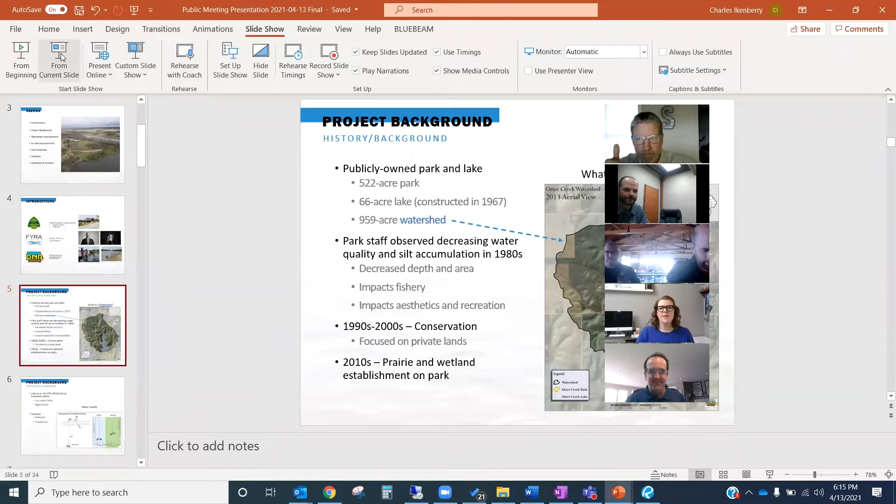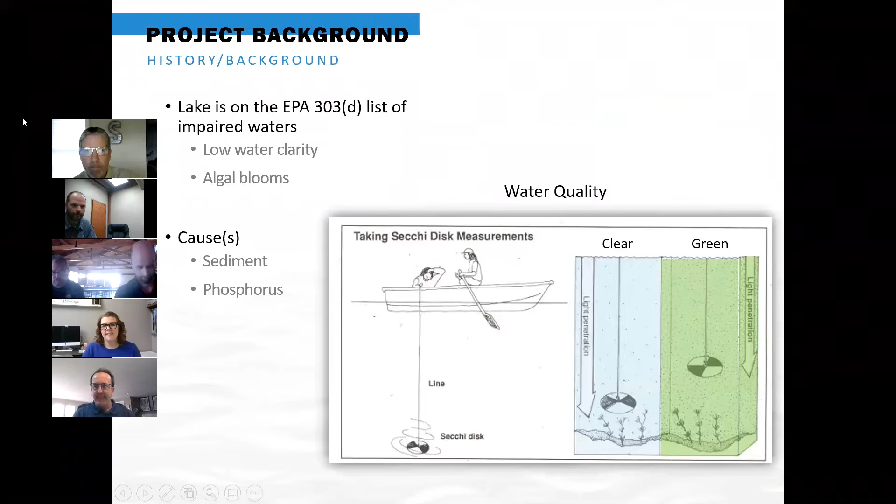Hey, Charles? Yes, George. I'm sorry to interrupt. I do not have any presentation up on my screen right now. Okay. Am I the same as everyone else? Okay. Sorry to interrupt you, but. Okay, let me reshare. You would think after a year plus of doing this, it would not be new technology, Michelle, but we're good to go again? Okay, thank you, George, for jumping in. Okay.

So a watershed, as I described earlier, now you should be able to see the map that shows the watershed or the land that surrounds the lake that drains to the lake. After being built in the late 60s, Tama County staff quickly noticed that some things were changing in the lake. Water quality was decreasing and silt had begun accumulating already in the 1980s. Noticed a loss of lake depth and some areas at the upper end of the lake that were filling in with sediment. And that, of course, impacts the fishery and also just impacts recreation and how the lake looks.

So as a result of that, conservation efforts got underway in the 1990s and early 2000s, focusing mainly on private lands in the watershed, implementing practices such as terraces and grassed waterways, things to help try and keep sediment from being transported through the watershed, making its way into the lake.

And then later in the 2010 era, Tama County did a lot of work on the park itself, establishing native prairie, tall grass prairie plantings with long-rooted vegetation, very dense vegetation that really cuts down on the rainfall runoff and the amount of erosion that can impact the lake, as well as establishing wetlands and a couple of smaller sediment ponds, in addition to one very large sediment pond on the park ground. Craig, is there anything else you'd like to add about the background or the history of the lake or the park?

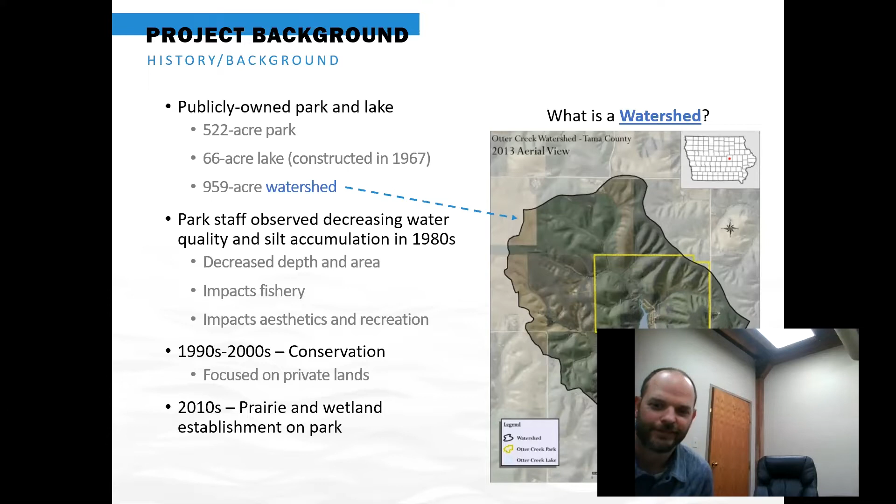So why are we here then? Despite all those past conservation efforts, which have been successful, the lake is still officially impaired. And what that really just means is EPA maintains a list of water bodies in the United States that don't fully support all of their intended uses. And so Otter Creek Lake is impaired because of low water clarity, which is most often attributed to algal blooms.

And an algal bloom is just simply an excess amount of algae that are a completely natural part of a lake ecosystem. But when they become too dense, you'll notice that murky green color, and it can affect aquatic life and recreation. And so the cause of that in Otter Creek Lake is twofold. Low water clarity is caused by both sediment, but also phosphorus.

Now, phosphorus in and of itself is just a nutrient. There's nothing wrong with phosphorus. But what phosphorus can do is fuel a little excess growth of algae, which can create that green color in the lake. So we want to try to reduce the amount of sediment and phosphorus entering the lake. And in some cases here in Otter Creek Lake, we're actually going to be exporting that material that's accumulated over time. We want to get it out of the lake.

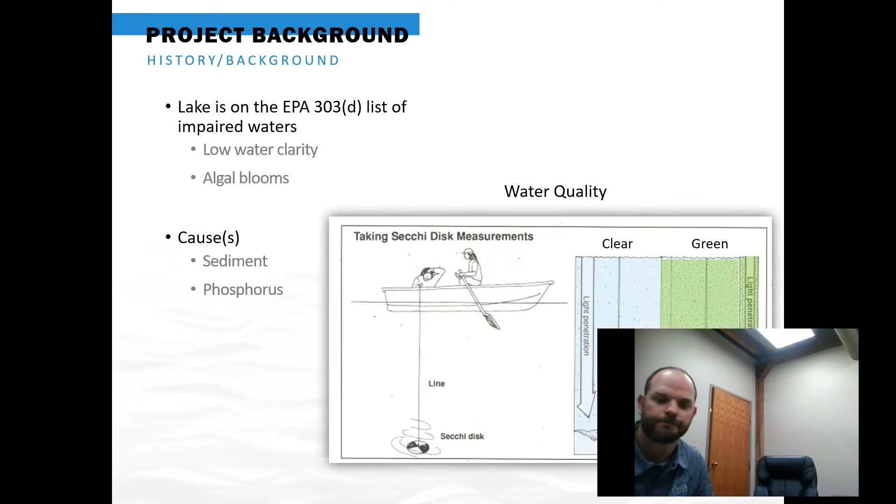Again, algal blooms can be one consequence of that. We've seen sediment deposition in Otter Creek Lake, low water clarity because of that chocolate milk kind of appearance that can appear after a rainstorm. In extreme cases, these problems can actually lead to very low levels of dissolved oxygen and fish kills. Fortunately, we're not in that situation in Otter Creek Lake, but that's where an extreme case can lead.

One of the key project partners here, obviously, is the DNR Lake Restoration Program, working across the state on publicly owned lakes to improve water quality. George or Michelle, I'll let you guys jump in here to describe your program and how your partnership with Tama County works.

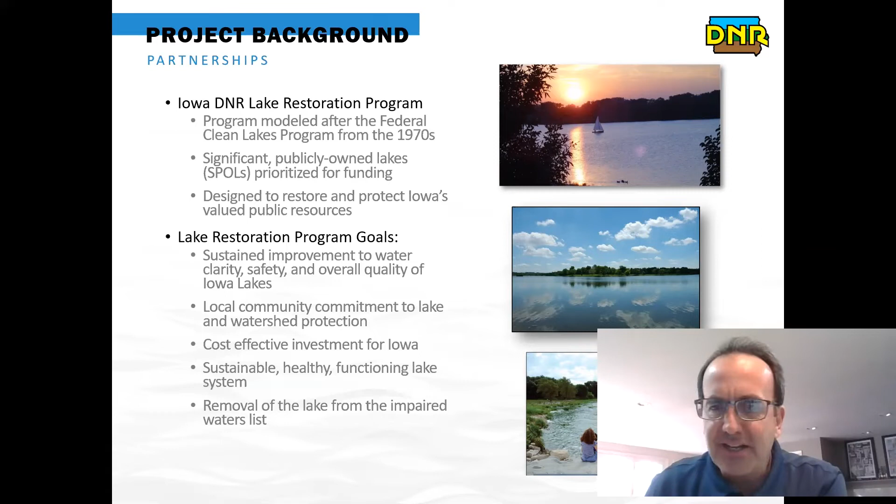Michelle, you want to go first or second? Do you have a preference? All right, I'll keep going then. And then we'll, okay. Charles, oh, where'd it go? Sorry.

Charles did kind of lay out for you some of the framework of the program, I guess I would say. So for me, I won't go through and read those items. I'll more focus on how fortunate we are to have a partnership there locally with your group. Kind of focus on that community aspect of this slide, and really that's what allows us to be successful in the long run.

Otter Creek Lake, like many of our constructed lakes in Iowa, is 50 years plus in age, and has a lot of issues that we need to address, as has been presented before. We're very fortunate in this state that the state legislature has made a very long-term commitment, going back to about 2007, in terms of funding a state program that allows us to partner and work with local groups to facilitate these types of projects.

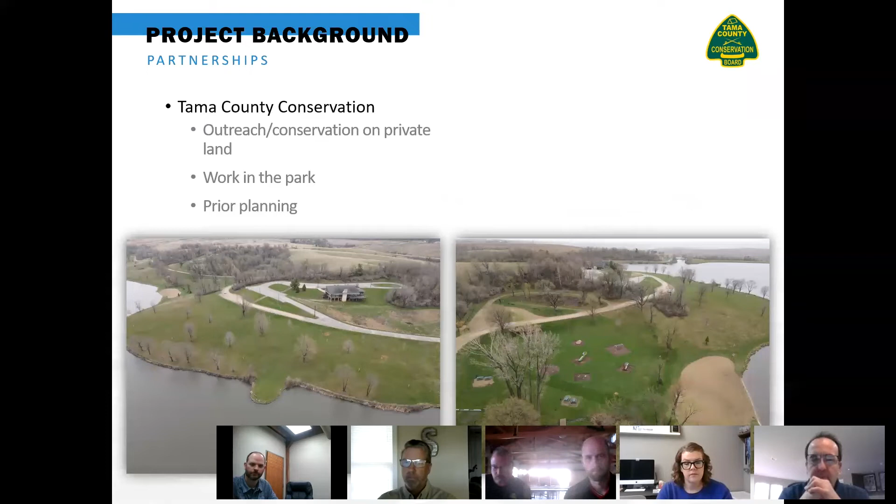Sure. So we were able to acquire some of the highly erodible crop ground surrounding the east and north part of the park. We've got that planted into prairie and trees as well, to try and help stop some of that erosion. And again, with the wetlands that you mentioned earlier, we're getting support from our supervisors for funding for this project. We're hoping to get some additional help with Region 6 planning, Tama County Community Foundation, and hopefully some fish habitat grants as well. Thank you, Craig.

So watershed improvements, we will start there. One of the two main components of the efforts to improve water quality. So there are a number of existing ponds and best management practices around the lake now, which is a good thing, but they are approaching the end of their design life, so they need a little enhancement or rehabilitation. We'll use the term BMP a lot, and again, that stands for best management practice. And a BMP is just simply a structure or a land management technique that's designed to trap and treat sediment and other pollutants. And so when we use that term, we're really just talking about something to try to cut down on the amount of sediment and phosphorus reaching the lake.

Here's a couple of photos of two of those existing features. One is going to be replaced. The one on the left is a small wetland at the north end of the lake that is silted in and has some issues with the outlet. And then the other one there on the right is BMP 5. We'll point that out to you on a map. That's on the west side of the park. And that is full of sediment. And you can see there the outlet structure is actually covered with grass and material. And so that's a bit outdated as well. So we'll be replacing that outlet structure.

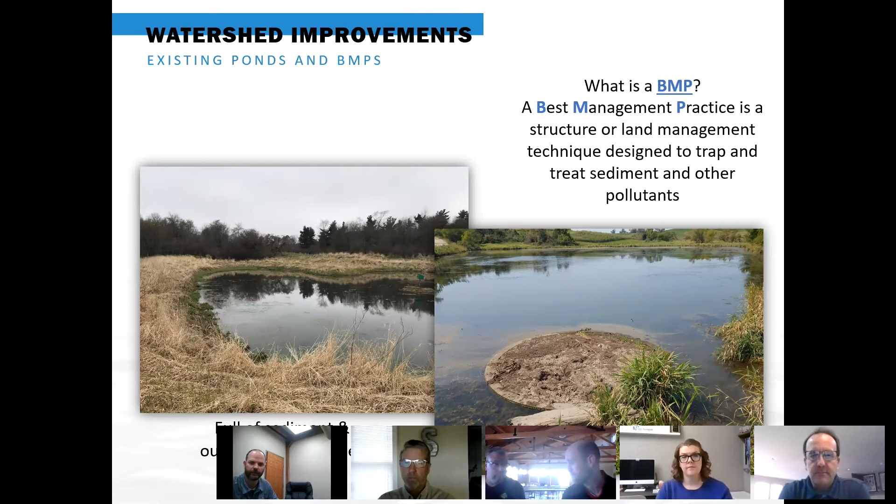We've got a couple of smaller existing wetlands. We're just going to be doing a little bit of cleanup work and maintenance. BMP 5, that's that larger pond on the west side. Again, doing some dredging, removing some sediment from that pond, and also a new outlet structure. And then BMP 6, that also has an outlet structure that has been washed out or is essentially not functioning at all anymore. So we'll be replacing that and removing some sediment from that facility as well.

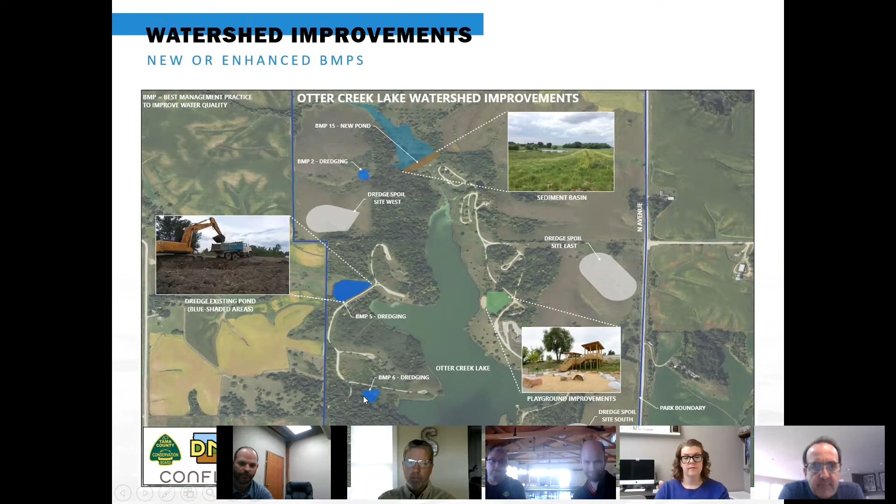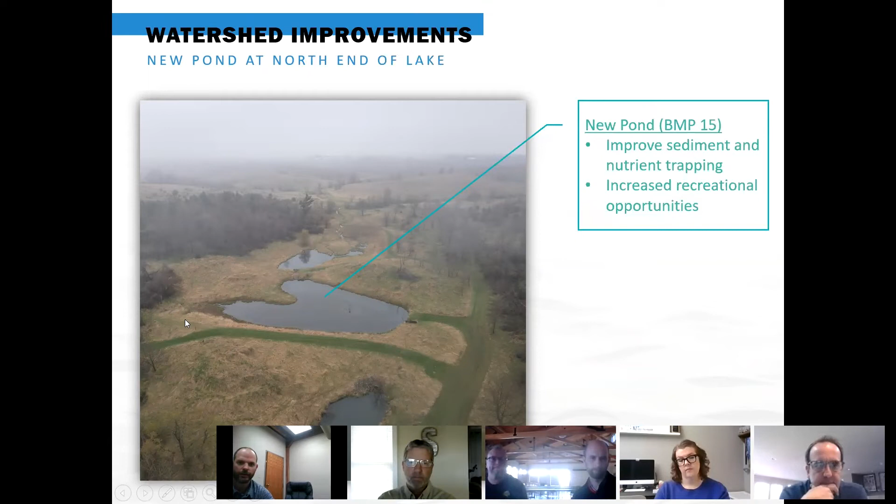Here's a photograph of the north end of the lake. This is actually the lake itself there at the very bottom edge of the photograph. We've got those two small wetlands. We'll be constructing a new pond here, again, to improve sediment trapping and to provide some recreation.

An example of that, this is from a project that we designed in the Omaha metro area. But here you see a lake that is a new lake that's under construction, and the water quality basin has already been built upstream. This one is flowing north. And you can see that water quality basin doesn't look too good right now, but this was after a rain. You see that chocolate milk color there. That means that basin is functioning as we will want it to down the road when this lake is finished, keeping sediment out of the lake. So that's what we're doing with BMP 5 and BMP 15, both of those water quality ponds.

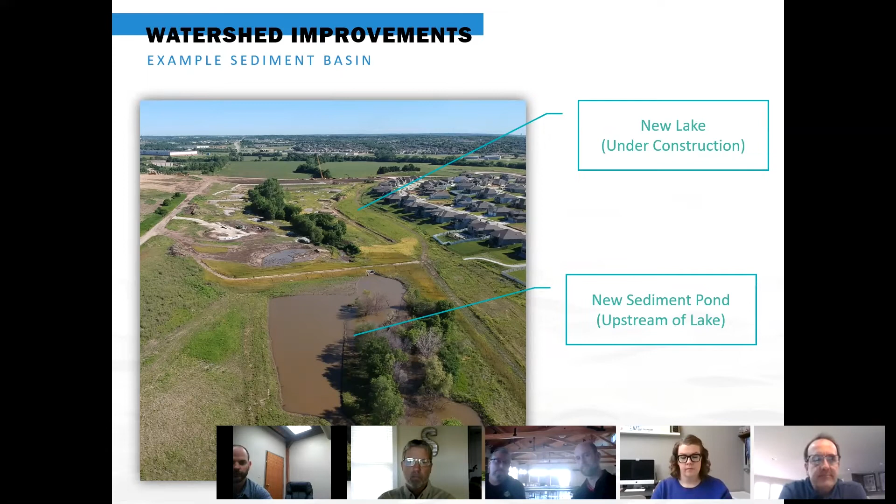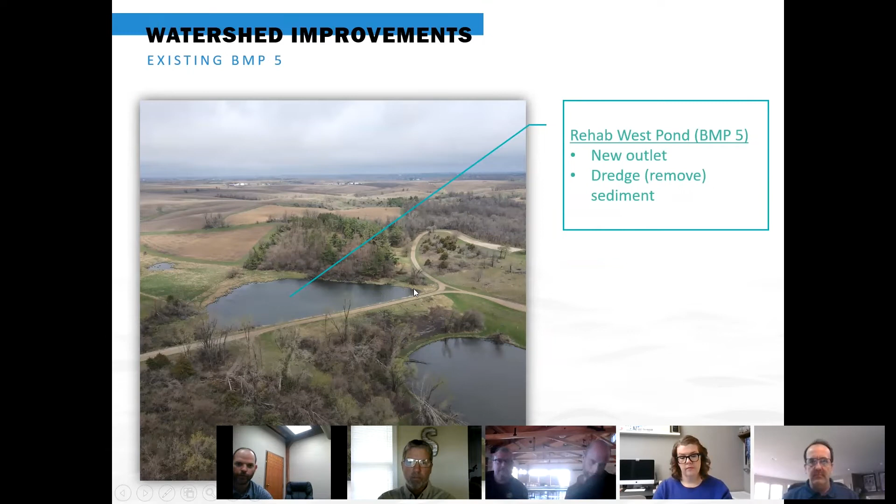Here's an image that was taken by a drone of BMP 5. This is west here. This is the West Park Road. And we'll be removing a lot of the material here. You can't see it, but it's not very deep at all here in this open water area. And that outlet structure sits in the corner, and we'll be repairing and replacing that as well.

In-lake improvements: Carly's going to talk about some of the dredging and shoreline improvement features of this project. Yeah, so our two main components when we do in-lake improvements are to improve the shoreline and add erosion protection and add fish habitat, but we also dredge the lake to enhance the depth.

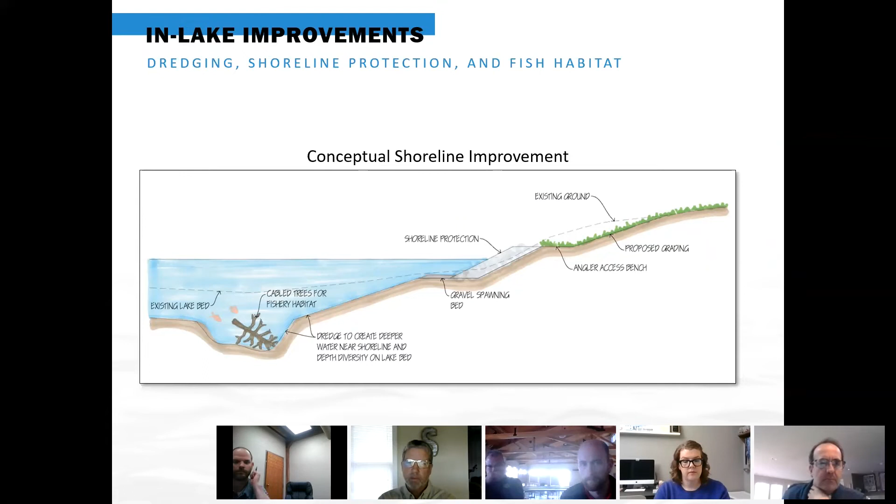This is an overall concept drawing. As you can see, we like to have easy access to the shoreline and then add some protection there to help erosion, and then deepen the lake and add some habitat. And this just provides an overall enhanced experience for lake users.

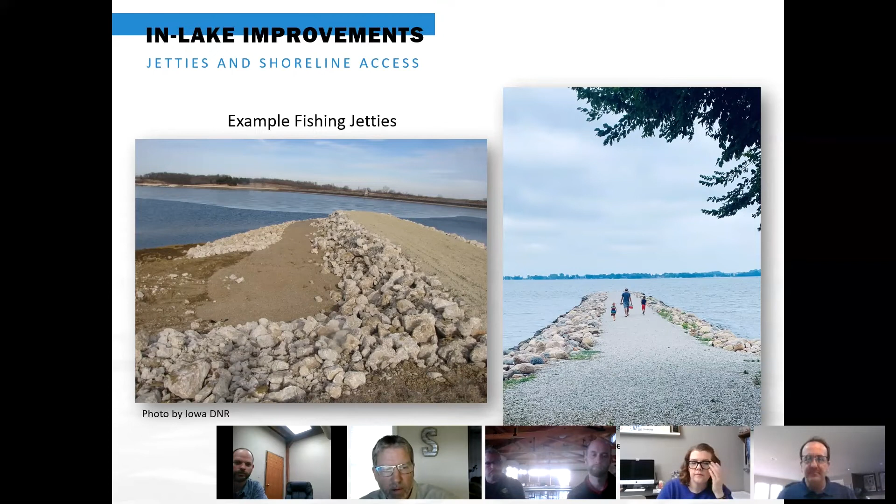So these are jetties, and a jetty is just a piece of land that goes into the lake to allow fishers or users deeper water access. And we build them with earth and put rock around them to help erosion. And both of these jetties actually result from prior lake restoration efforts. George and Michelle, one at Storm Lake on the right, and you might know, George and Michelle, the one on the left, what lake that is from. That's Pleasant Creek Lake. Okay, so very typical, and we've got a few of those showcase jetty features at Otter Creek Lake as well.

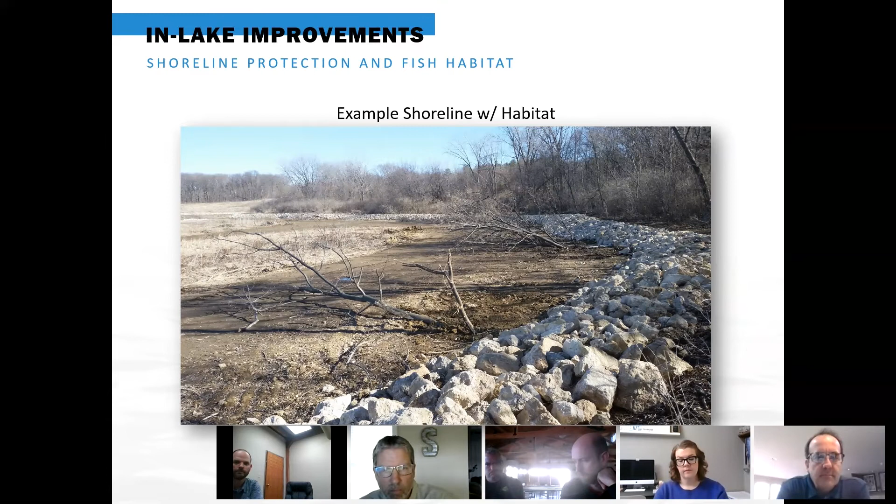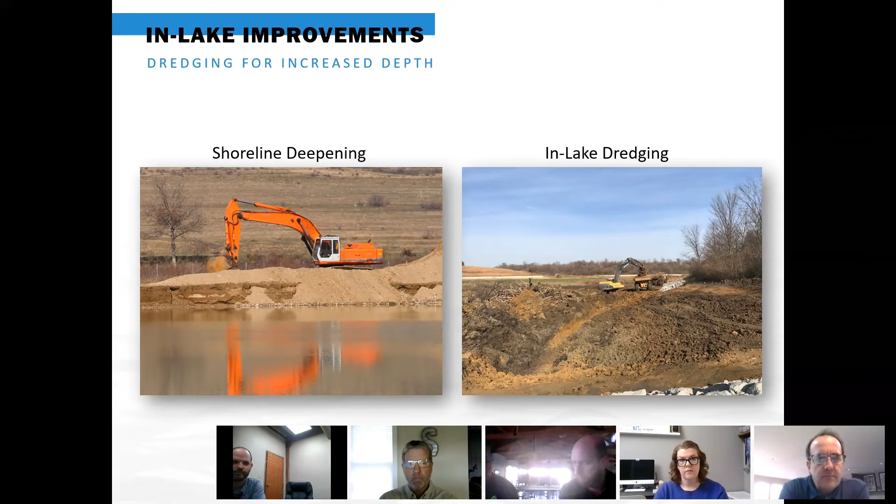This is an example of some fish habitat. We like to put fish habitats closer to shore so people have easy access when they're fishing. So to dredge the lake, we will be using mechanical dredging for this project, which is just taking sediment out again. We will be taking about 150,000 cubic yards out of the lake, which, if you were to stack it on a football field, would be about 90 feet high.

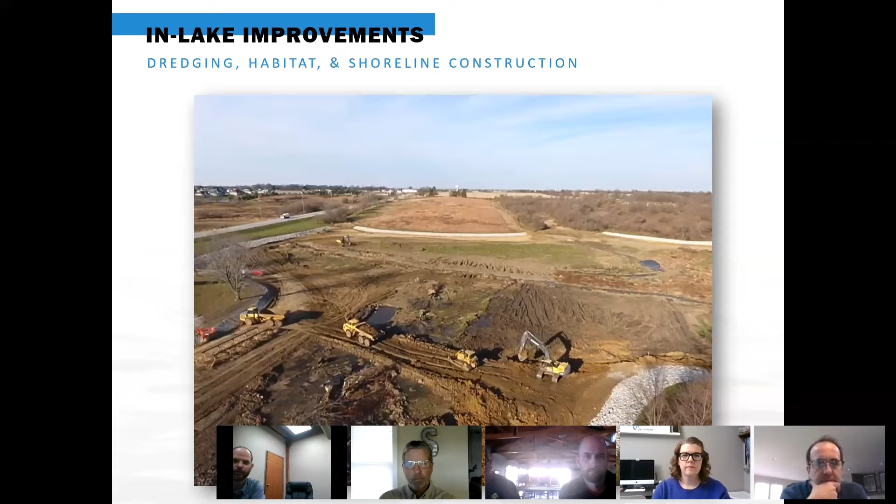This is an overall view. If you were to go out to the lake during construction, you would see dump trucks getting filled with sediment, and then they will be taken to a spoils containment site that Charles will talk about next. And this is also an active lake restoration project over on the eastern side of the state in the Quad Cities area. This is Lake of the Hills. Actually, this is a smaller lake called Railroad Lake, just upstream of Lake of the Hills. So that one's still getting wrapped up, but that's what you can expect to see out at Otter Creek Lake eventually.

Carly mentioned that material that comes out of the lake, that dredged sediment, we've got to put that somewhere. And so here's an example, again, at Lake of the Hills, where we design a site to contain that material. So this is on a hillside here, and you'll notice we'll put a small sediment basin down at the bottom end of this. We want to make sure that any material that comes out of the lake, out of these red circles, and is stacked here, this is just a nice place for that material to dry out.

It will actually consolidate. So Carly's number of 90 feet on a football field, that's when it's pretty wet. After it dries down over time, that'll consolidate by about 30% typically. But nonetheless, we want to make sure that material stays put so that it doesn't make its way back to the lake. We have a few of these sites around Otter Creek Lake that we will point out.

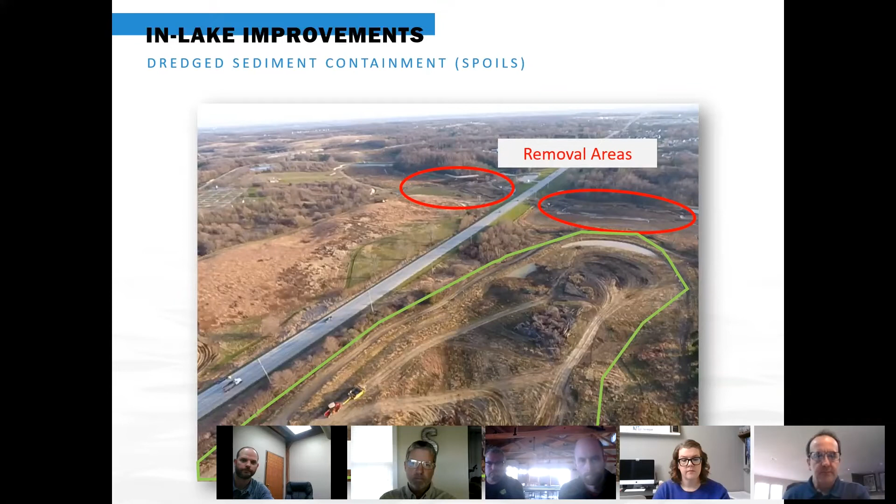Now, how are we going to do that? Obviously, it's pretty difficult to do work in the bottom of the lake with all that water there. So we do need to get the water out of the lake itself. And in Otter Creek Lake, we won't be altering the existing spillway where water exits the lake. You can see that off to the top of the photo here. That spillway is working just fine, but it just does not have the ability to drain the lake like you could drain a bathtub. So part of this project will be to actually incorporate that kind of facility.

So we'll be adding a drawdown structure and a drawdown pipe towards the middle of the dam. So we'll actually have to open that dam up a little bit. We'll be notching it, letting the water out, and then putting that structure in. And then in the future, if Tama County needs to do maintenance, whether it's for future shoreline work or future dredging or future fish renovations, it will be much more cost effective for them to do that in the future.

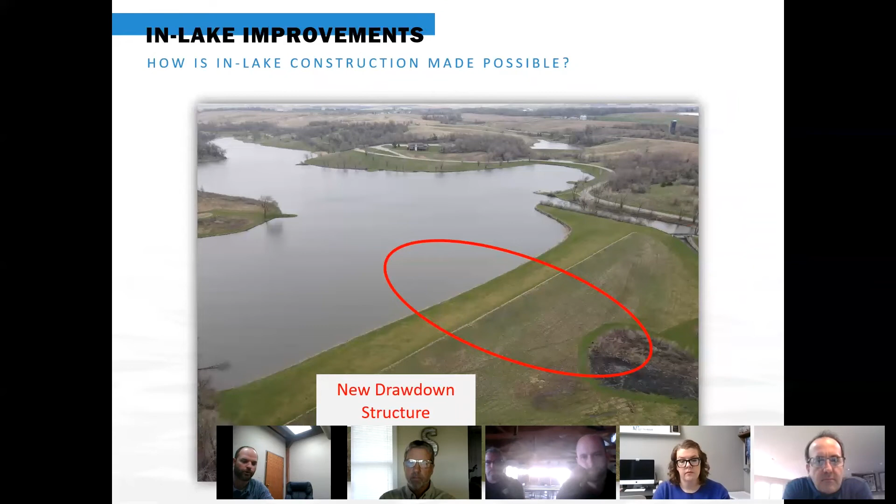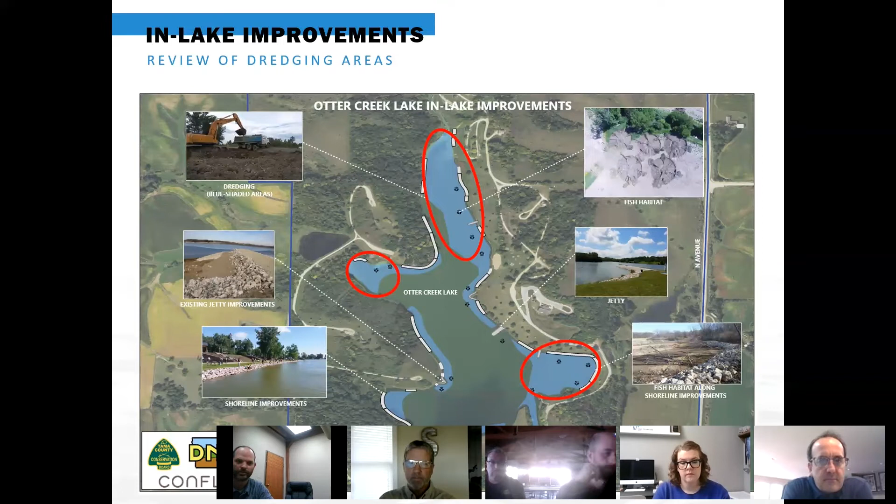And this just reviews those locations of some of the features that we just walked through, where some of the dredging and the shoreline work and the jetties will be constructed. Those gray areas on this map will be the spoils containment sites. So that's where we'll be hauling material out of the lake, storing it in these sites here. We have up to 3 locations. We're going to give the contractor a little bit of flexibility. They may only need 2 of those 3 locations. So some of those details we're still working out and will be up to the contractor to some extent.

But we've got an area here on the west side of the lake, up to the northwest, one on the east side of the lake, just south of the public hunting area, and then to the south near where the former house used to be, the ranger residence down there on the southeast corner.

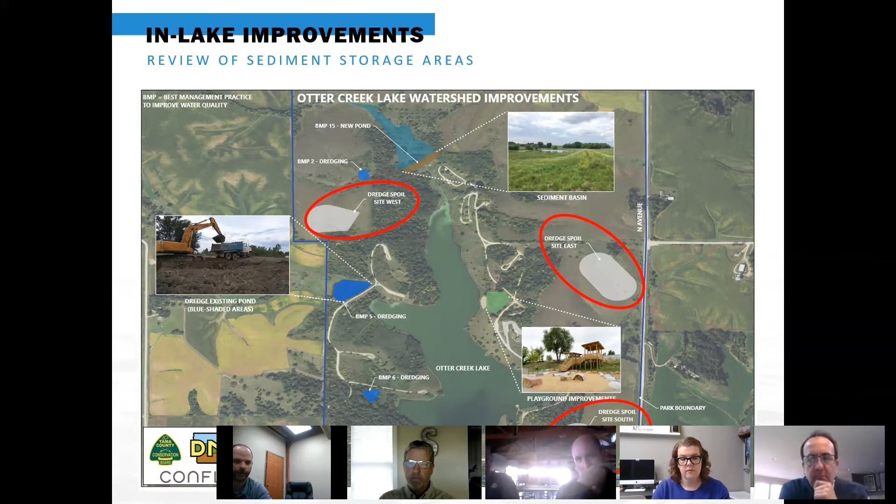Right now, water runs across the beach a little bit. We're going to make sure that we take care of that little drainage issue. And so that's going to be a real nice feature that a lot of people will really experience firsthand and see. It will be a very obvious improvement to the park.

Here is a rendering by Confluence. These are the landscape architects that are helping with this component of the project. That existing parking lot here, if you can see my cursor, is tucked in here. We'll be moving it across the road here. We will be saving those 3 campsites that people can camp near the playground and the beach and watch their kids play and that sort of thing. And then just improving the drainage again.

We don't have actual playground equipment picked out yet. So these are just examples. I want to be very clear, just examples of some more natural looking, modernized type of playground equipment, something typical of what you might see when we're all finished here at Otter Creek Lake. Craig, did you have anything you wanted to add to those improvements to the park itself that I missed?

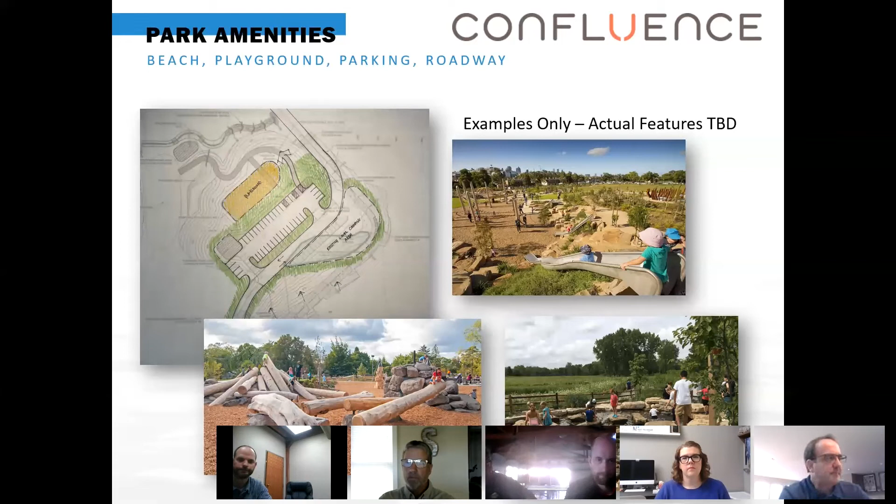I do want to talk about schedule.

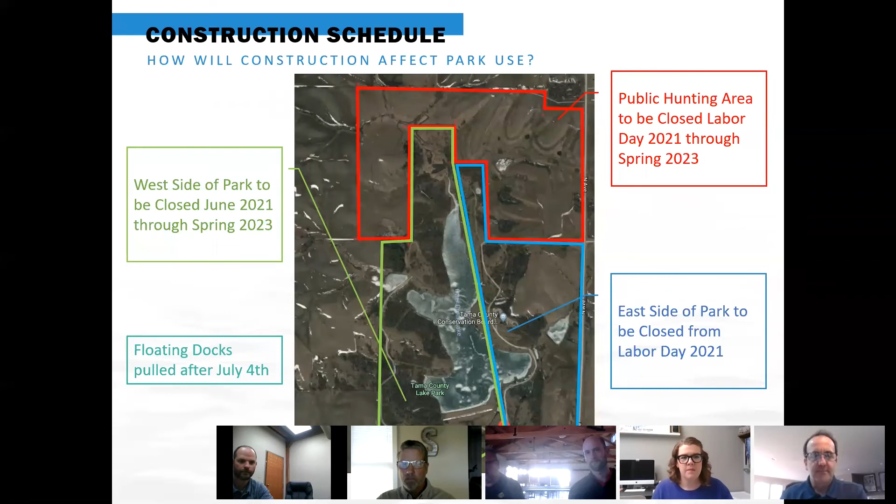George or Michelle, anything from your perspective to add to the schedule notes? No, there's always a little bit of tentativeness with some of these because Mother Nature can throw us, as you've mentioned, curveballs, but this is our best estimate for what it will take to get done. Very good. And that is really all that we had to present formally. We are armed with all the supporting information and can answer questions.